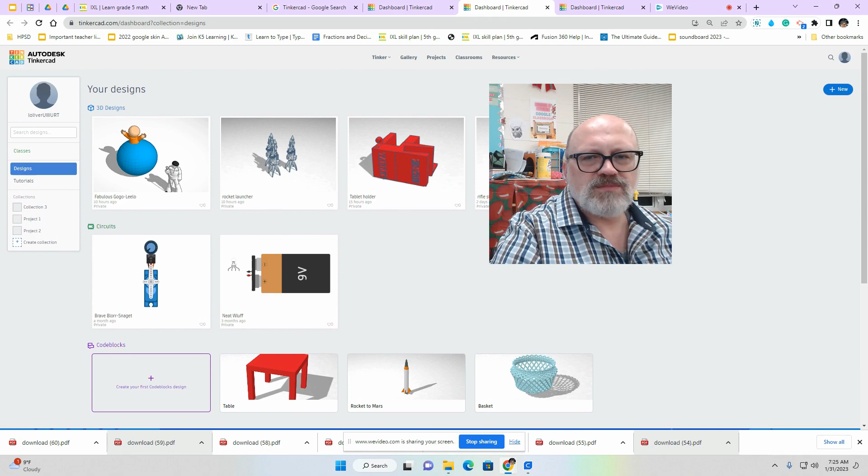Now I'm just going to give you a quick look through some of the designs. Here are some designs that I have done either by myself or with students in my classroom. This here is a tablet holder. Here's a little toy car. Here is a house, and by clicking here you can see a smaller image of it, and then click this and you can tinker it.

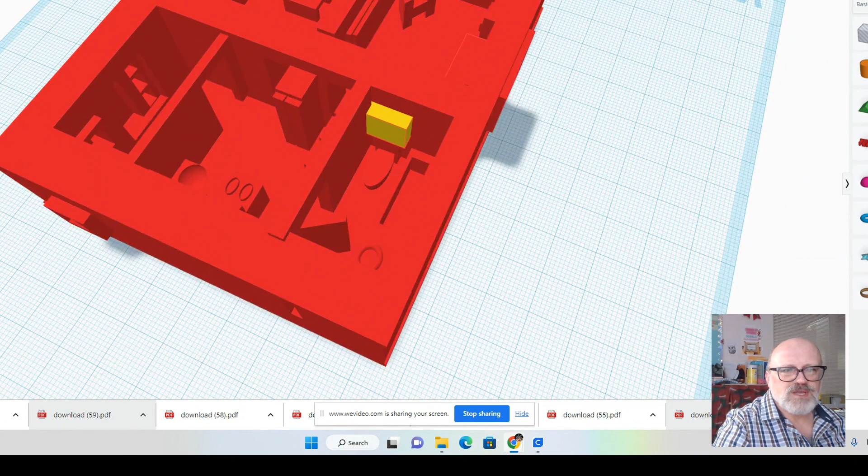As you can see, the kids' designs can get very complicated if they want to, or very easy if they want to. It all depends on what they want to do with it, and what you want them to do. It also has some tutorials you can go through to learn some of the basics. And this one right here is really nice because you can use it to make, if you wanted to, a keychain for a digital art class.

Now I'm just going to show you very quickly the basics of these. Once you've got your class, you click class and create a new class, and you put your information in right here. I'm just going to put in the class name as testing. And I'm going to choose which grade I want it for. I'll just put in other for right now, and I can choose which subject. I'm just going to put in other and create the class.

Now, once I get this testing class and go into it, I can get a class link that I can send to all of my students. Or they can just type in this code when it asks them. You can use your Google email to set this up, and the students can use theirs.

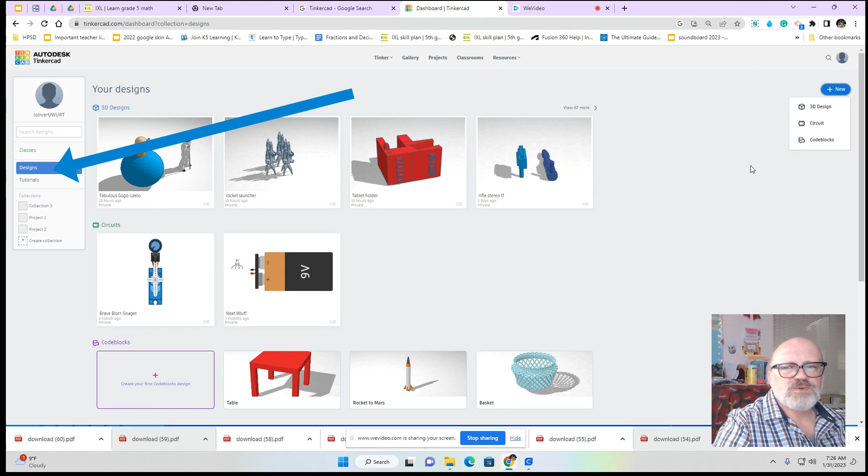Now the next thing I wanted to do is show you some of the basics when it comes to creating. When you come to a design and want to click a new design, you click this right here and click 3D design. The toolbox is pretty simple — there are a lot more complicated things out there than this. Here you have your plate movement. This one allows you to turn your plate 360 degrees. You can look under, above, all sorts of things like that.

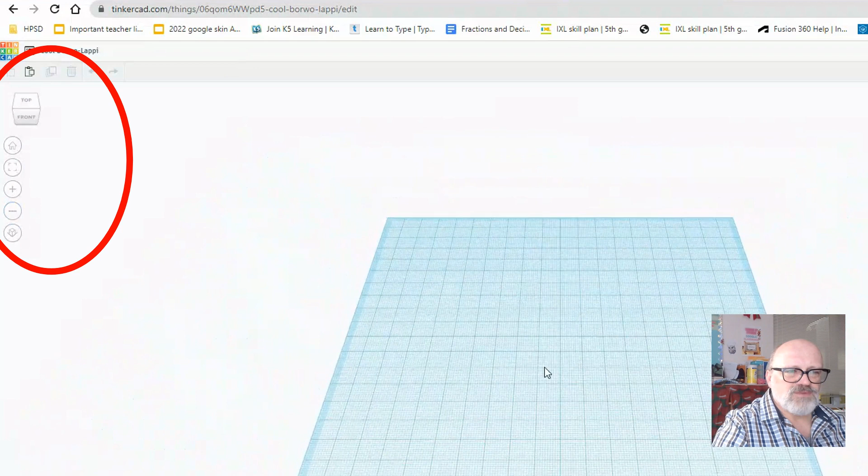In case you ever get lost, this is your home button, brings it back. This is your select button. This is your zoom button, but if you're lucky enough to have a mouse, you can roll to get your zoom. This one here is the switch for flat view if you want to look at it directly from above. And if you want to pan, meaning move left and right, up and down, you hold on to your mouse button and pan just by using your mouse and holding down on your wheel.

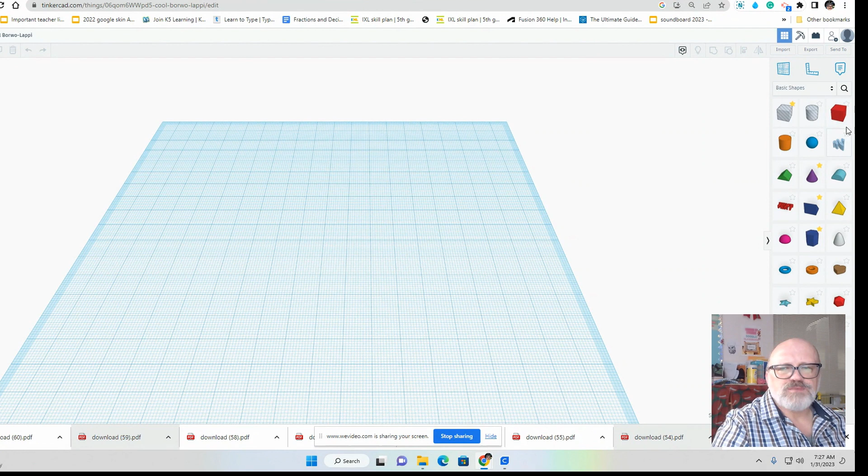Over here are the different shapes, and as you notice, there's two colors: there's see-through and then there's colored shapes. I'm just going to put in a square here for us right now really quickly and show you. Here's a square, and this is a solid shape.

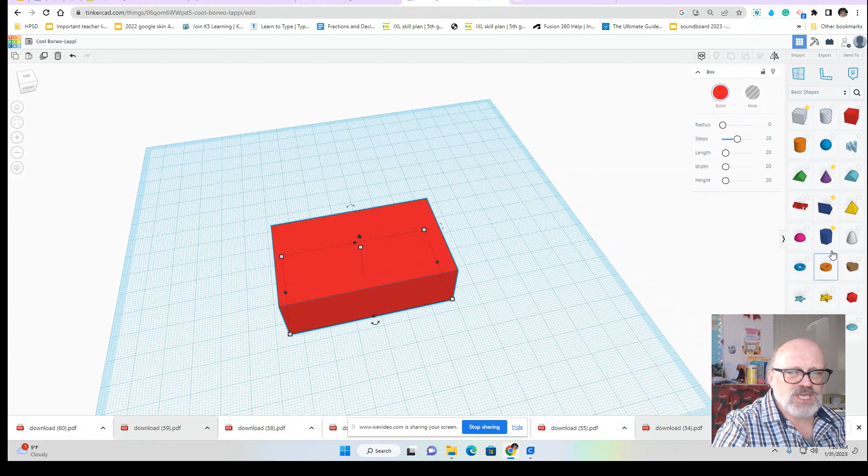Now, the see-through shapes are exactly that. They allow you to remove sections. Every single one of these can be made see-through. So I'm just going to go grab one of these and take a cut out of this thing just to show you. I'm going to select everything by holding down on the mouse and going like that.

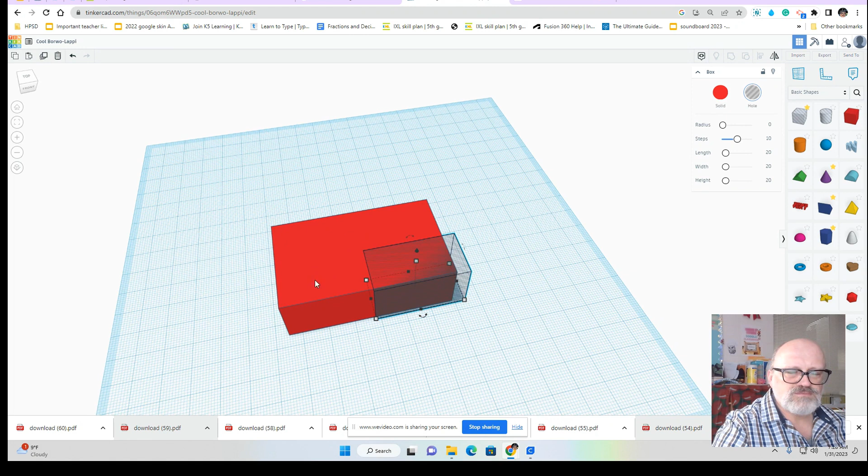Now, if they're on a Chromebook, what you do instead is click both shapes. You'd click one, hit Control, and hit the other, so that you have both shapes highlighted. Then you're going to click this button right here, and this is our group button. What this does is allows you to cut sections out, and you can do that with any of the sections.

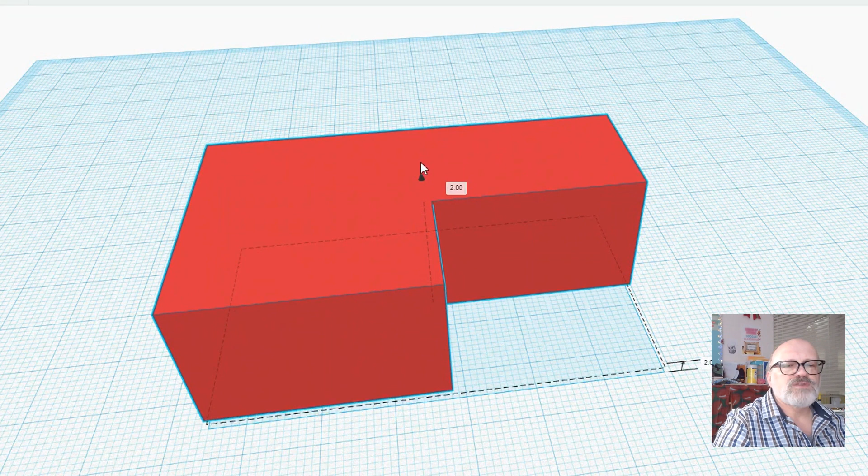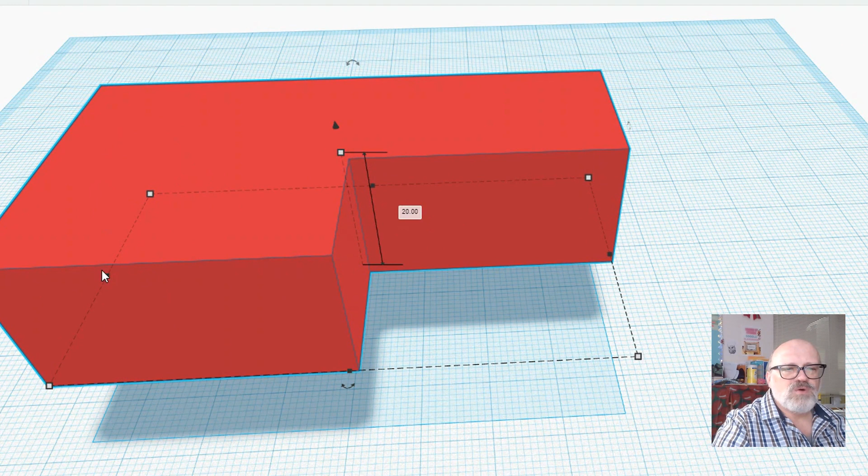Now I'm going to zoom in and show you some of these arrows. This arrow here is your lift button, so lifting up and lifting down. And if you look at it from the bottom, they'll actually change the direction at times. These are to change the size of the shape, so you can change size like this. You can make it thinner, you can make it thicker, all depending on these small white and black boxes.

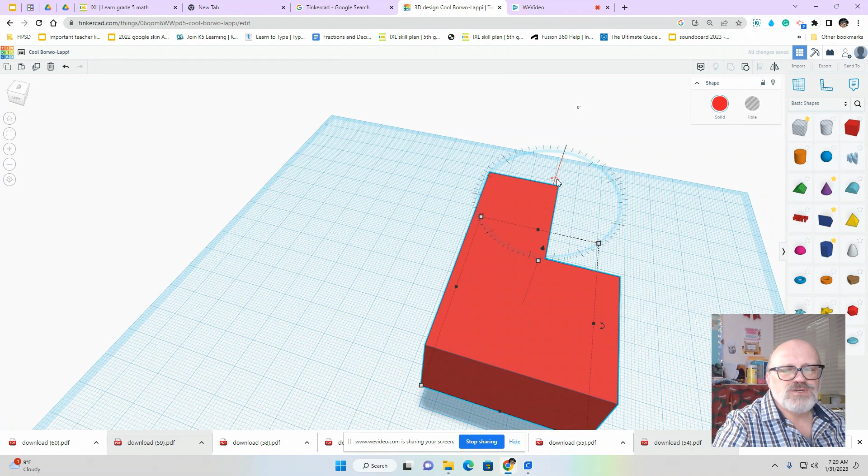Okay, and finally you have these double-sided arrows. I'm going to move up a little bit and zoom out to show you. You'll see these double-sided arrows, and they allow rotations. You'll see different ones on different angles. This allows a rotation too, and there's another rotation. And how you do it is just like this.

So teaching rotations to kids is pretty simple when you work with this. You would use this to teach a rotation, and you would just grab it to teach a slide. And if you wanted to do a flip, what you do is quick and simple: you come to this right here, click mirror, and you're able to do simple flips. So here you have a lesson already when it comes to your 3D shapes.

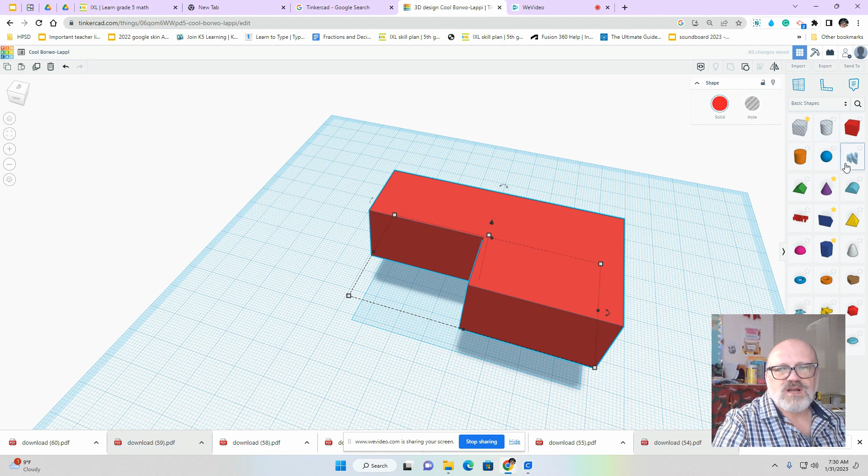Now, when it comes to building and putting things together, you have a very large library here. Here's your library of different shapes, but you get to choose other ones if you want to. So kids can choose to go into electrical if they want to, and they can choose to put in a little resistor if they're doing something in grade 5 and build a circuit board, or any of those things.

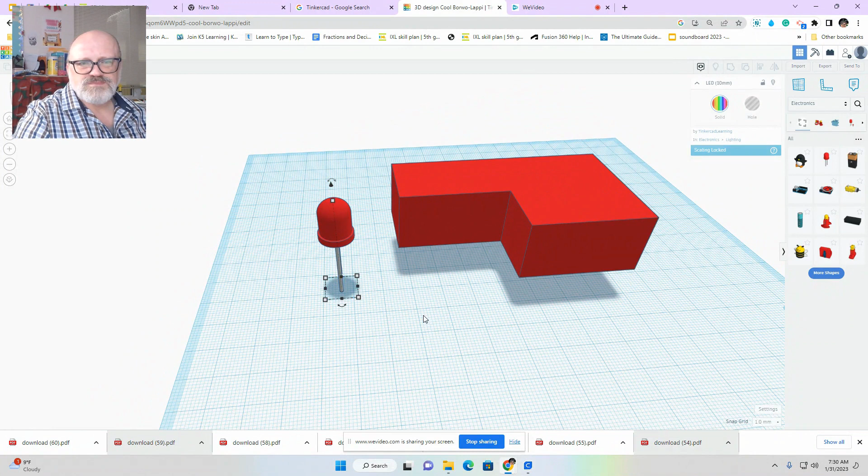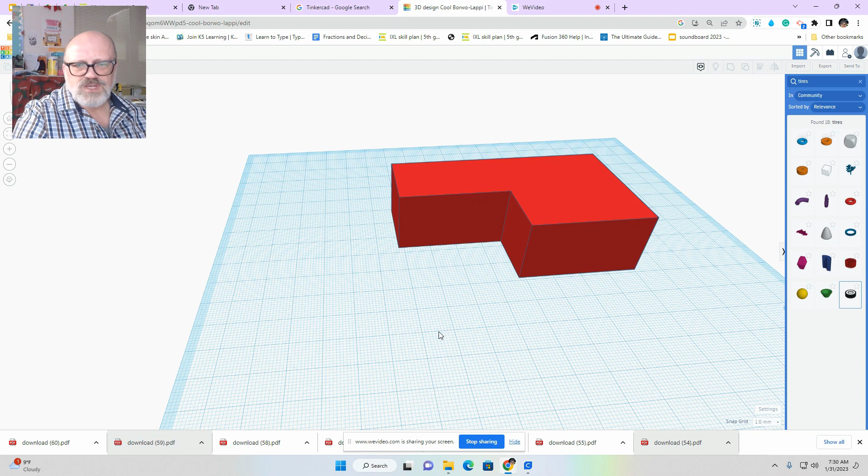Just going to click back - I'm going to go back to my basic shapes. This also has a search button so they can look up a specific thing. So if they wanted to look up tires, because they want to do a car, they have all sorts of different types of tires they can choose to bring over. As you can see, these tires are editable - you can lift them, you can turn, and you can do simple rotations in order to line them up. You can also talk about what shape these are and tie that to the curriculum.

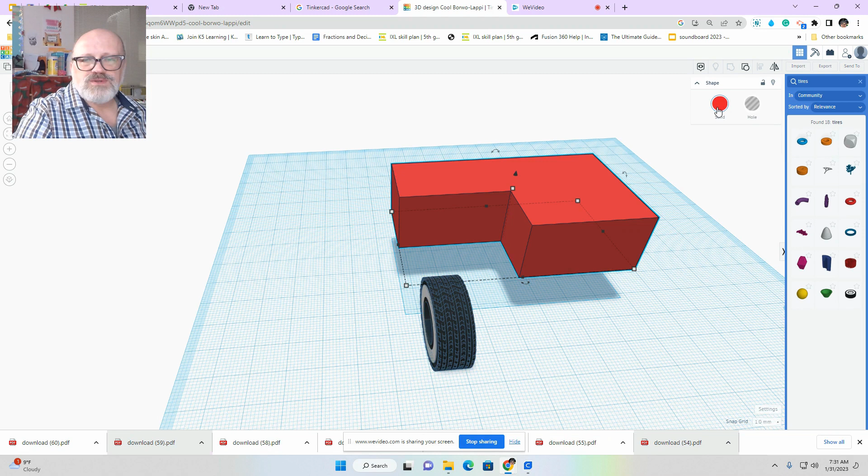Now, you can do some color changes too. But if you're using a 3D printer, it's all going to come out whatever stuff is in the 3D printer. But sometimes color changes help students be able to see things slightly different. Be careful you haven't got a kid who is colorblind.

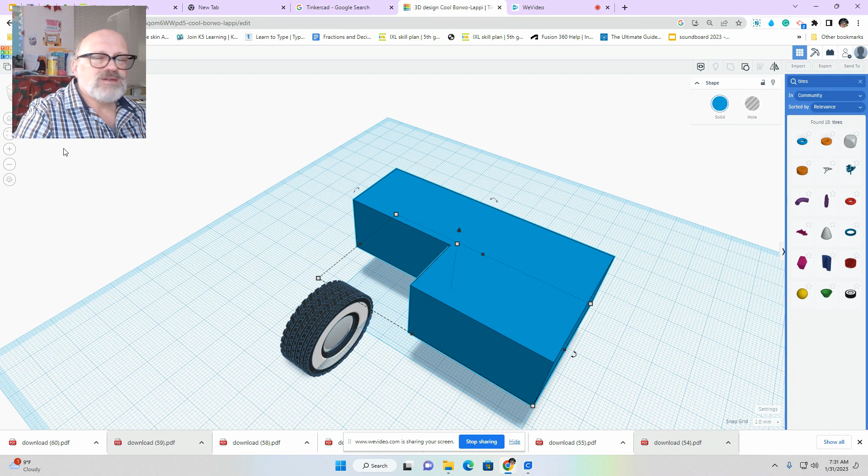Now, like I said, this is going to be a quick little run through, but when it comes to saving these, this is the fun part - they save it for you. It's saved for you. You don't have to worry about a student losing work. But they'll give you some really weird names.

So my suggestion is to get the kid, as soon as they go in, to put down what it is. And I'm just going to call this a testing block, just to show you. That way it's going to be easier for them to find.

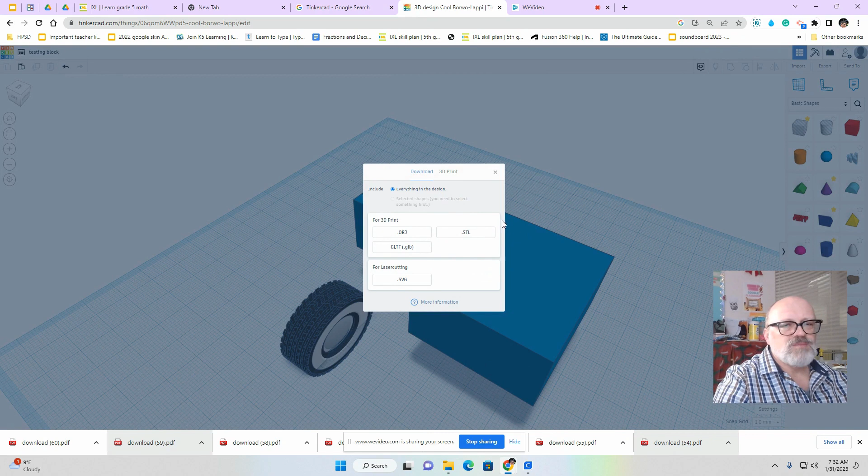Also, when it comes to saving these things, you want to be able to use the word export. Export allows you to download it directly to your Chromebook and then upload it if you want to. But the cool thing about this is when you have classrooms set up, students don't have to export anything to you.